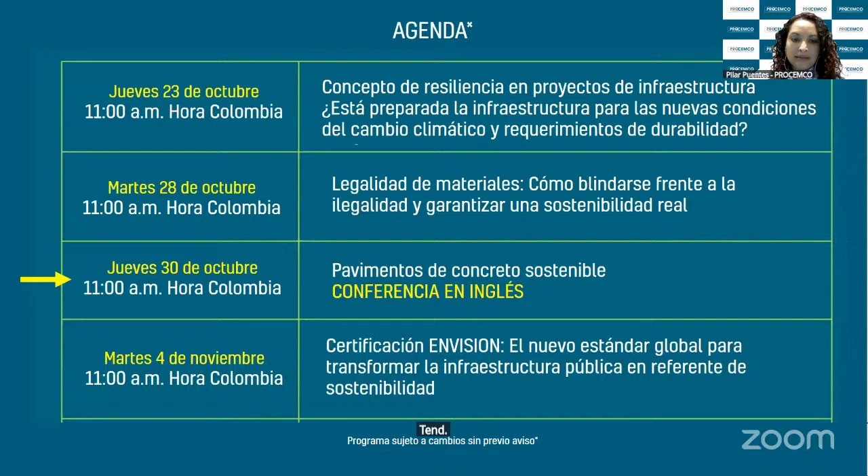Tendremos esta tercera conferencia y para presentarnos este tema nos acompañará Thomas Van Dam desde Michigan, Estados Unidos. Y como les anunciamos, esta conferencia será dictada en inglés, no tendrá traducción simultánea, pero sí subtítulos en tiempo real generados por IA. A continuación voy a presentarles a nuestro conferencista de hoy.

Él es Thomas Van Dam, ingeniero civil con más de 39 años de experiencia en materiales de concreto, en sostenibilidad, resiliencia y evaluación integral. Sus áreas de especialización incluyen durabilidad de pavimentos y losas, investigaciones forenses y la reducción de gases efecto invernadero. Ha dirigido numerosos estudios de diseño, análisis de costo de ciclo de vida y estudios comparativos de concreto con bajas emisiones de carbono, incluyendo maquetas a escala real con más de 100 publicaciones. Ha colaborado en proyectos de investigación exitosos para agencias federales, departamentos de transporte estatales y la industria privada.

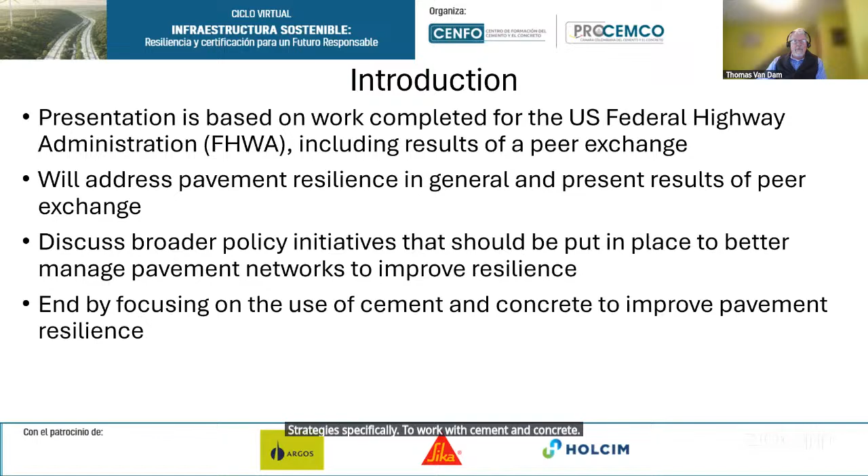Now, there are many resources that you can download. In the United States, we are having, let's just say, a difficult time these days. So some of the publications that we have worked on in the past are no longer directly available. But if you search by title, you will still find them. So they are no longer on the Federal Highways website, but they are still available on the web. So you will get this presentation, so you'll be able to download these resources to help.

I will start by talking about the relationship between sustainability and resilience. Sustainability is there to seek solutions that avoid changes that will impact people and the environment. So when we work on sustainable solutions, we're trying to prevent bad things from happening.

Resilience is related to that, but it's really how do we bring about strategies that will help us endure and survive those impacts. So when an impact such as just happened this week with Hurricane Melissa struck Jamaica, many people think this is related to climate change, the immensity of that storm. What resilience is about is building our infrastructure to resist the damage and then quickly get back and serve people.

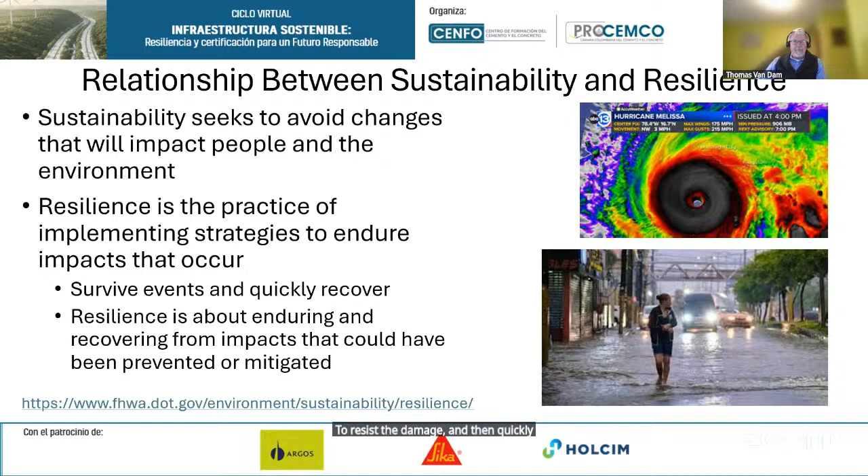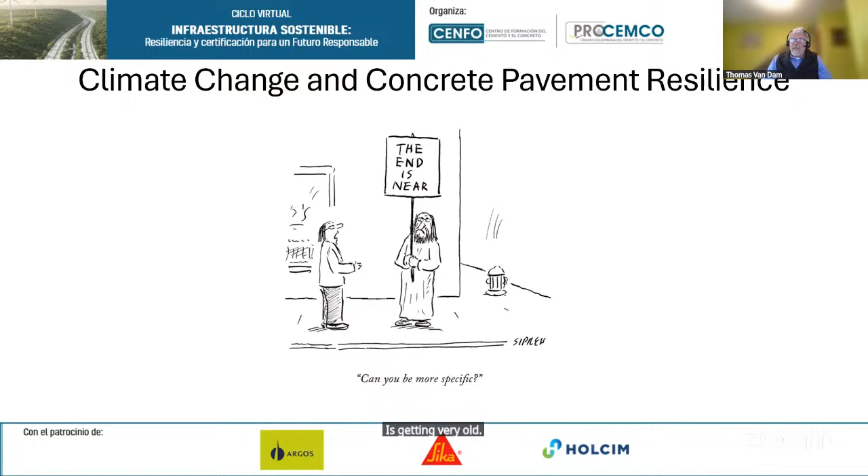Now, this is a hippie holding a sign. This was something common in the United States in the 1960s. And the hippie sign says, 'The end is near,' and you can see this hippie is getting very old. But the individual is asking, can you be more specific? What end is near? So I'm going to talk about climate change and resilience.

Some people do not believe that the climate is changing, but it certainly is. The Arctic is melting, temperatures of the ocean is rising, sea levels are rising. We're seeing flooding events are increasing in both frequency and magnitude, and hurricanes such as we've just seen in Jamaica are becoming much larger and more intense.

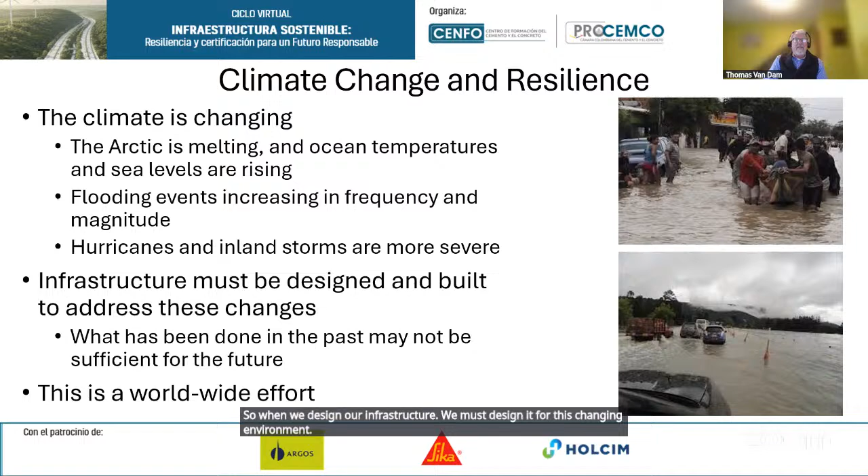So when we design our infrastructure, we must design it for this changing environment. And that is really what resiliency is about. And this is a worldwide effort.

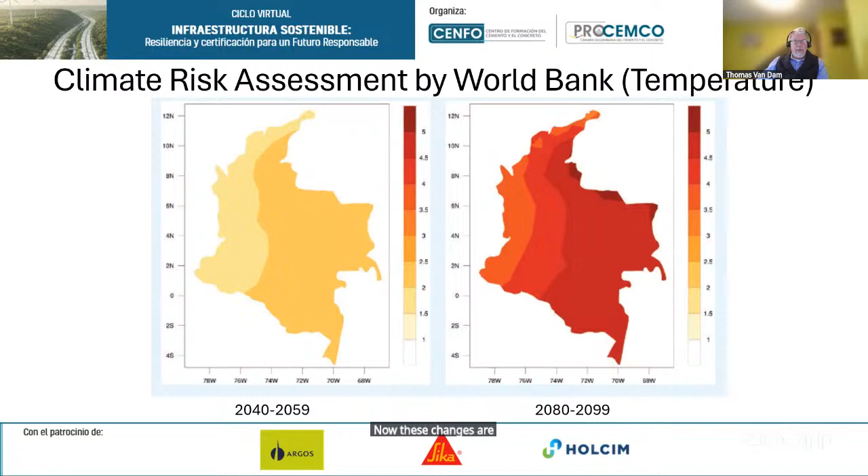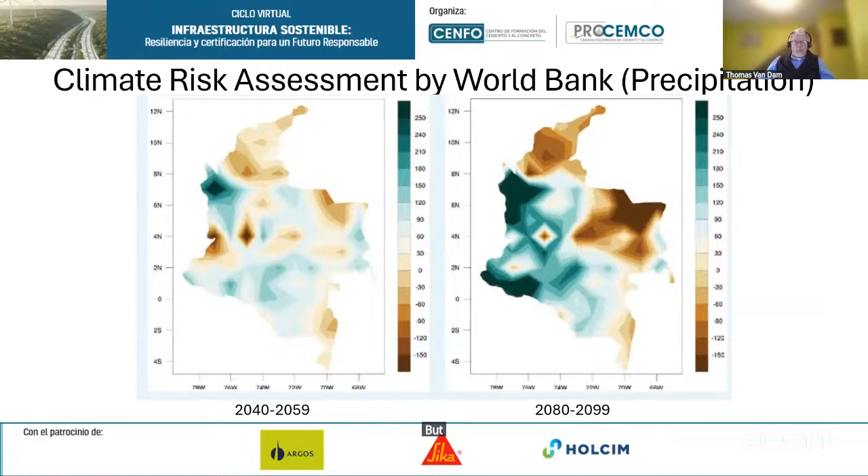Now, these changes are not the same everywhere, but they are overall rising. The changes in precipitation, on the other hand, are variable. You will see some areas are going to get much more rain. Other areas will be getting less rain. So this is something that we will have to adapt to. Many people want to paint a broad picture and think that the trends are the same everywhere, but they are really quite regionalized and something that we're going to have to account for.

So this FHWA peer exchange that we completed a few years ago was really interviewing different DOTs about the impacts of the climate change on pavement. So I will start with the results of that study. The number one issue identified throughout the United States was flooding. So many people think about temperature as being the big change, and that's going to have the biggest impact on, I think, the health of individuals. But from the infrastructure's perspective, it's going to be flooding.

We're going to see increasing coastal flooding due to sea level rise, so that even when it's sunny out, when we have certain tides, roadways will flood that did not flood before. We're going to see coastal flooding when we have big storm events, again, such as we just saw in Jamaica. We're going to see increased flooding of rivers that flow into the sea, because as sea level rises, it kind of dams up those rivers. And we're going to see a lot of riverine flooding. Rivers will flood inland due to high intensity storms that we have not witnessed in the past.

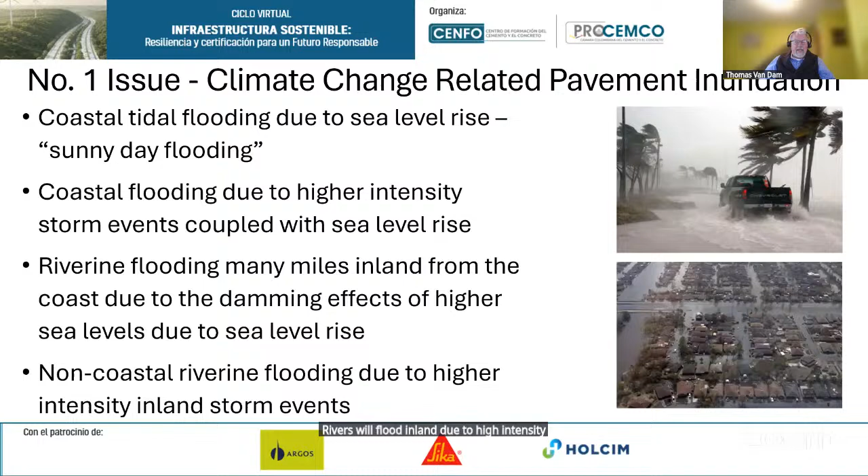Other issues that are related to flooding: there's a lot of uncertainty that now a pavement has flooded, when can we open it back up to traffic? Because we need to get in very quickly to bring in aid and restore service. But when a road is flooded, a lot of damage will occur, and I'll talk about that more so towards the end. So just the fact that the road is getting wet is raising its chance of it being damaged by vehicles.

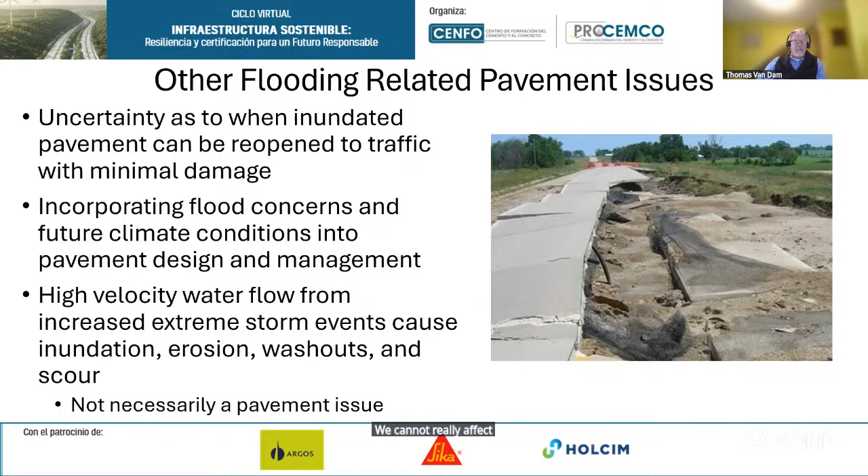Then there's this high velocity water flow. This issue is not one that we can handle with a pavement issue alone, but this is where roadways erode and they wash out. So it's a related issue, but one that as a pavement designer, we cannot really affect. That's really up to drainage and how do we handle that.

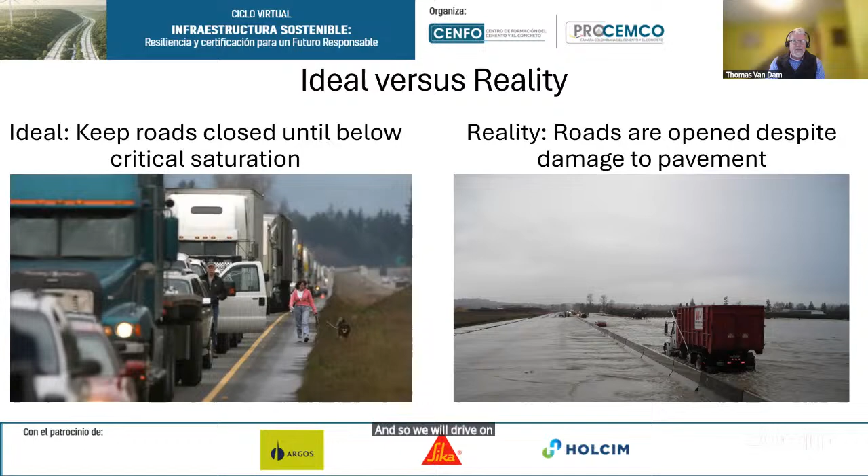In the ideal world, if a pavement floods, we just all wait, we get out of our vehicles, we walk the dog, we have a good time waiting for it to dry. But that's not reality, right? The reality is that we have to use roadways. They're necessary for health, they're necessary for safety, they're necessary for our economic well-being. And so we will drive on these roadways as quickly as we can, sometimes while they are still flooded.

Non-flooding related issues identified by state agency people include temperature as a factor. It will affect some pavement materials more than others. We know the pavement material most affected is asphalt, whereas concrete pavements are relatively unaffected by rising temperatures.

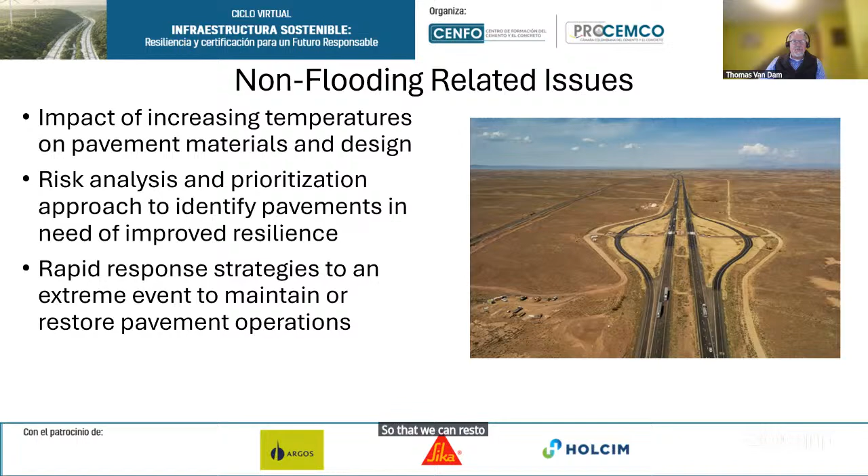We also need to do risk analysis and prioritization to identify the pavements that are going to be most in need of improved resilience. I'll talk more about that later. And then there's this idea of rapid response strategies - how can we know that the pavements are going to be safe to drive on without damage, so that we can restore pavement operations and allow them to be used again to support our society?

When they started looking at techniques specific to dealing with the climate, the first thing everybody focused on was flooding and inundation. That doesn't have to be a flow of a river - it can just be a rising water table.

One of the first things people talked about is, why don't we make the roads higher? We can simply raise the elevation of roadways. But that can have very negative impacts - if we raise a roadway, we're effectively creating a dam, and we may be damming surface water that would normally flow across the pavement, causing more severe flooding. Some agencies in the US have gone to building causeways or very long bridges through areas threatened by continued flooding, but that is very expensive.

Another strategy has been armoring roadways to make them less susceptible to erosion when overtopping occurs. We might not normally put paved shoulders on our roads, or prevent erosion of embankments that don't normally see flooding, and this may become necessary.

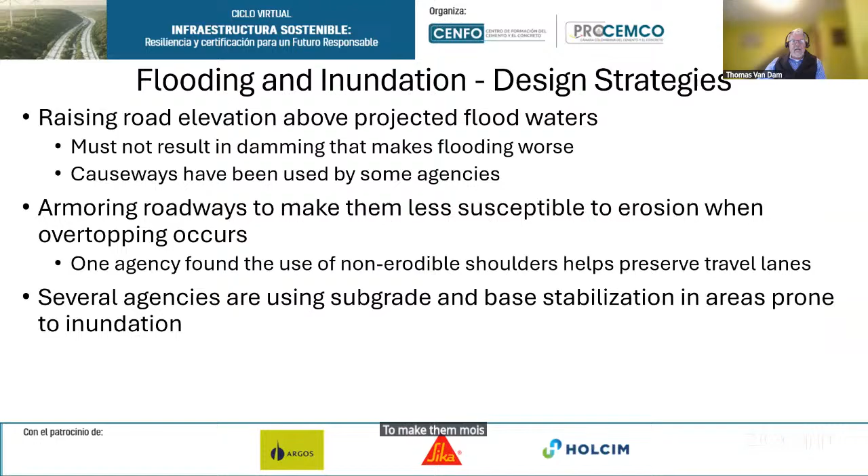Several agencies in the US are now starting to use subgrade and base stabilization. This is where we treat these unbound materials with cement, most often to make them moisture tolerant and keep them from becoming weak when they get flooded.

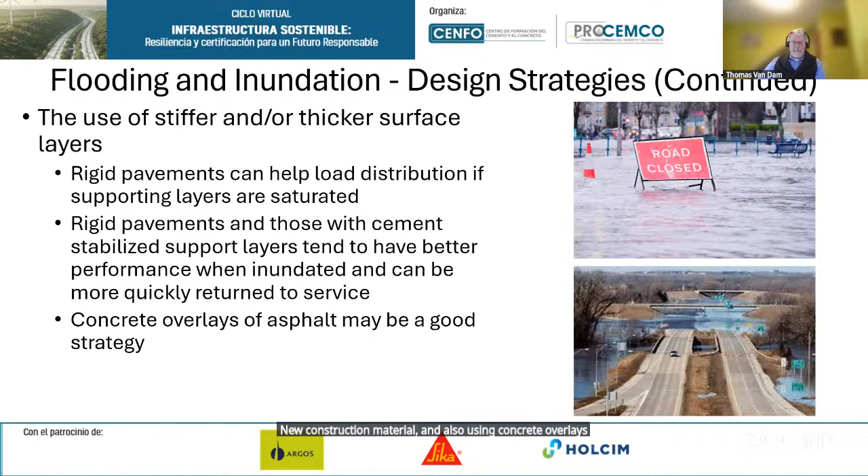One approach most attractive to the concrete industry is using stiffer and/or thicker surfaces. Rigid pavements - another word for concrete pavements - distribute the load much better than asphalt pavements, and therefore are most often more resilient when flooded. This is really the focal point of a lot of the efforts: why concrete can be attractive as a new construction material, and also using concrete overlays over asphalt to make those asphalt roadways more resilient.

Another approach discussed is more robust pavement drainage, to facilitate the rapid removal of moisture from not only the surface, but the subsurface of the pavement. This includes the use of geosynthetic materials and permeable pavement systems.

The final technique looked at is how do we know when it's safe, or can minimize damage to the pavement, before we open it to traffic. Something like a falling weight deflectometer for structural assessment has gained a lot of popularity, where you can test and say yes, we are ready to open. The problem is for many unbound pavement layers that are not drainable, they can take weeks and even months to regain structural capacity.

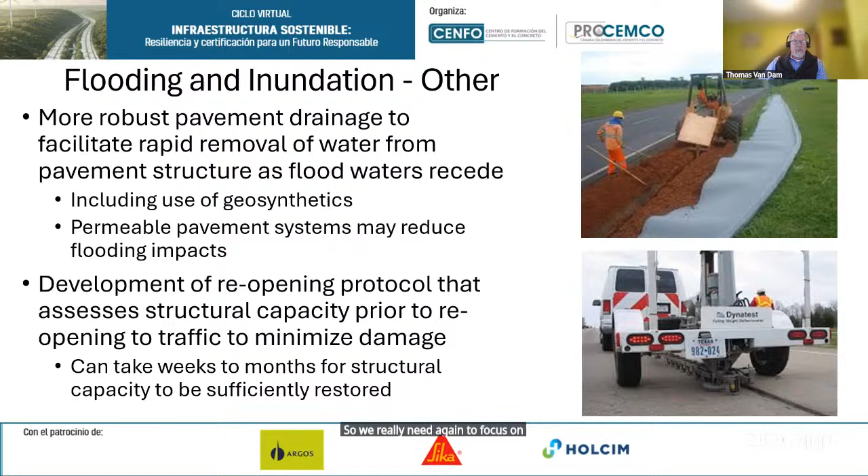So we really need to focus on making these structures more resilient. Now for things to address temperature - basically, concrete pavements are relatively insensitive. I'll talk a bit about risks of concrete pavements coming up, but in general, concrete is a very resilient material.

When building with asphalt, there's a whole lot of things DOTs are looking at. They are polymerizing their binders, building thicker layers, and moving towards what's called balanced mix design. This is a concrete presentation, so I won't spend much time on asphalt, but there are a lot of efforts to try to make asphalt more resilient.

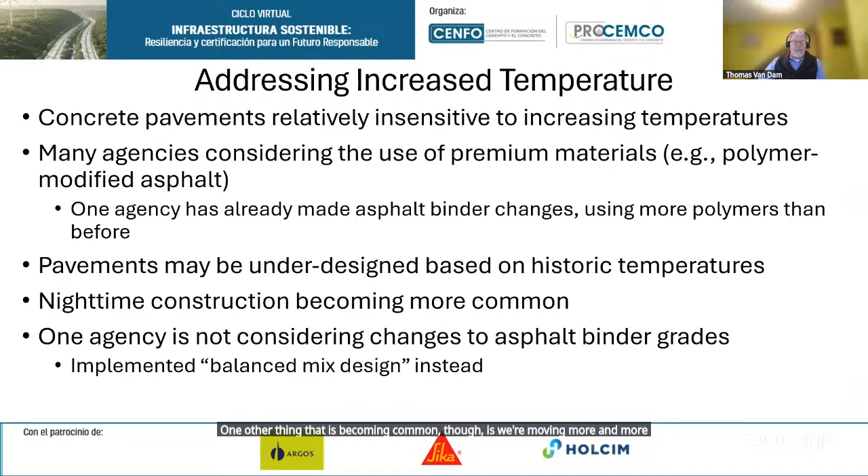One other thing that is becoming common is we're moving more and more of our construction to nighttime to get away from the heat of the day for the sake of the workers.

So when we're addressing design deficiencies, current pavement design methods typically are not accounting for the changing climate. They're not accounting for the level of flooding and inundation that will occur, and to a lesser degree, not accounting for temperature increases. So tools need to be developed to help agencies better design for the coming changes in climate.

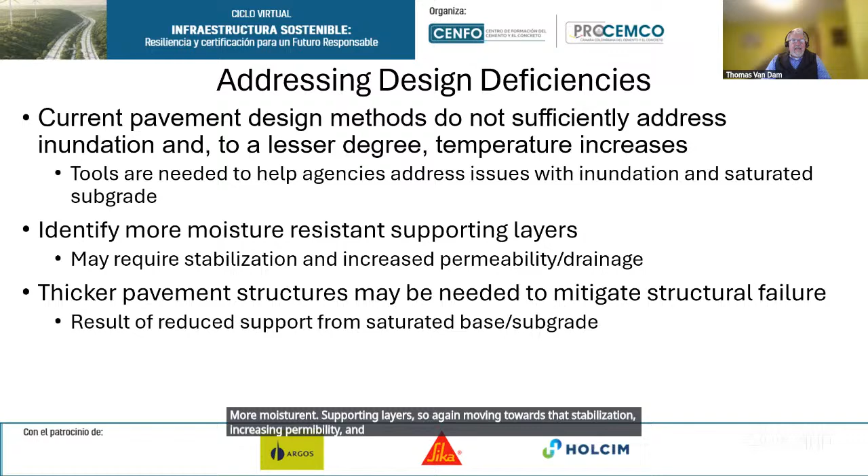This theme keeps coming up again as I go through what the agency people said: we have to identify more moisture resistant supporting layers. So again, moving towards that stabilization, increasing permeability and drainage, and then thicker pavement structures than we have designed in the past.

A really important thing that was pointed out is we have to do a better job of tracking flooding data, and we have to identify how it's affecting our pavements. This is going to create a recalibration of our design models so that we spend the time to understand these impacts and establish and use design, construction, maintenance, and emergency repair protocols for those identified pavements.

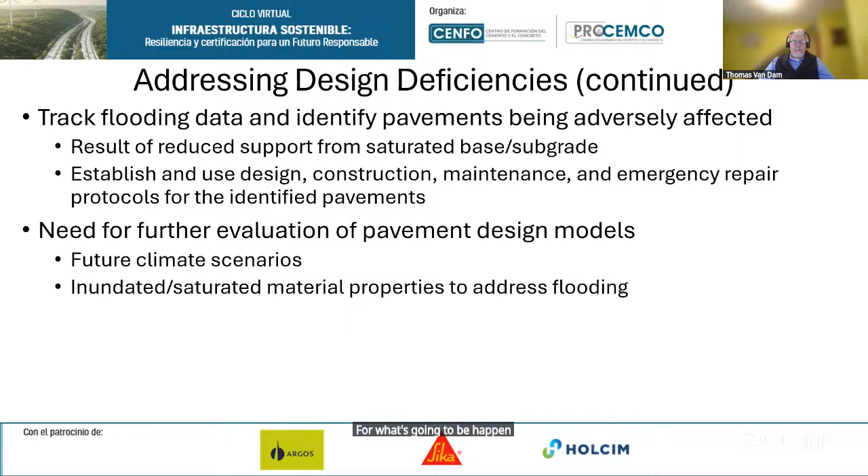There is a need for further evaluation of pavement design models. There's a broad feeling that what we have done in the past is not necessarily going to be adequate for what's going to be happening in the future. So a lot of efforts are going to be expended here.

So the final thing that was brought to the peer exchange groups was how do we approach improving the resiliency of our network? When we look at a network, there are 5 steps that were really looked at.

The first is understand site context and the future climate. The second is evaluate the pavement against future climate scenarios. The third, develop, evaluate, and select adaptation measures. The fourth, review additional considerations. And then the fifth, monitor and revisit or revise as needed. I will go through each of those in a little bit more detail.

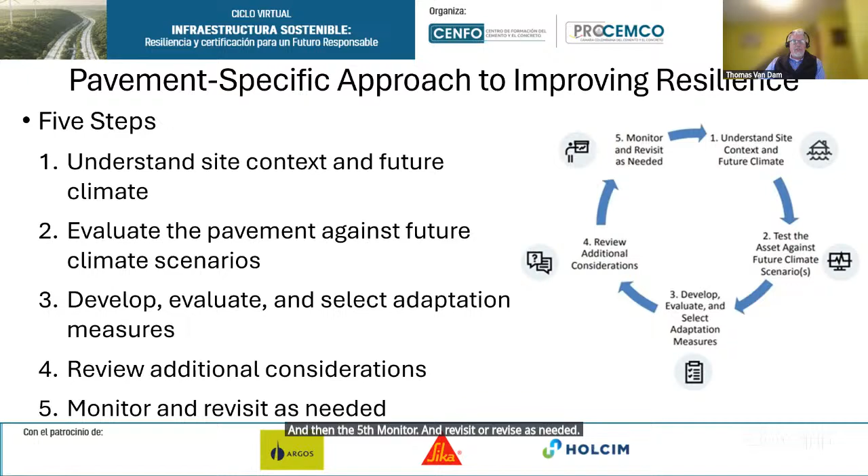So understanding site context and future climate is really, I think, the first key step. It's to look at your pavement network and calculate and determine what are those critical links in your network. Our networks consist of a series of highways to local roads.

It's not just how much traffic it carries, but you have to look at the impact if that link is removed from our network. What is the impact on people? What is the impact on commerce? Can we get food from the markets to the cities? Can people get to hospitals? What is the impact if we lose that link, and how do we adapt? So a very broad analysis of the network to identify the high value links is critical.

Once we identify those links, then we look at our projected future climate and see how they would affect that link. As I mentioned, temperature is not the focus here. It's looking at flooding - really looking at where within our network we expect flooding to occur in the short term and the intermediate term.

So we identify, okay, these are our links, here's where the flooding's occurring. Then we look at the pavement data for those critical links that are going to potentially be at risk. And from that, we determine if they're vulnerable. What type of materials are they built out of? How thick are they? What's their elevation? And then we can really get into that specific climate data, and this key data is often available from universities or from the various environmental agencies that countries have.

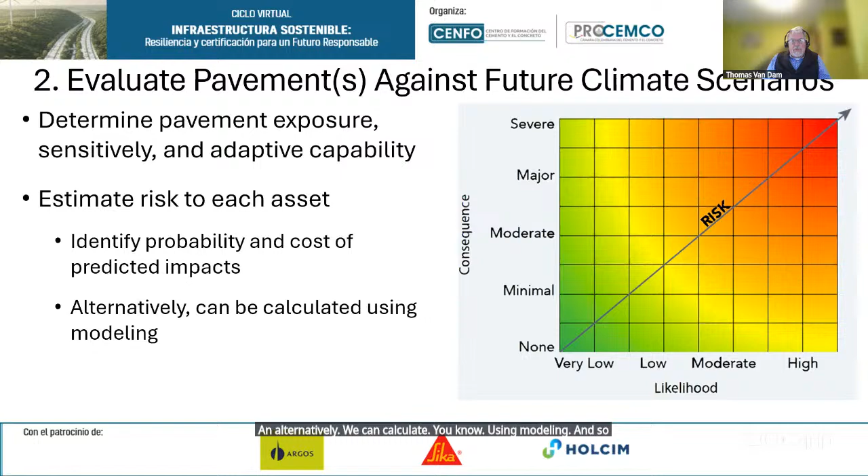You identify probability and cost of predicted impacts, and alternatively we can calculate using modeling. I think this is a very interesting thing to study, and we really need to do more of it. Once we do that, now we have to consider all the possible solutions to address the limitations we've observed. So here we're developing, evaluating, and selecting adaptation measures.

Often agencies have their mix of fixes, which would mean they have a very short list of potential repair strategies for damage that they see. Here's the time to broaden that and look at fixes you maybe did not consider before. It's also important to do studies to look at what has been done by others, what has been found to be effective. We're talking predominantly Colombia and other South American countries here, but you can look at what's been done in North America, Africa, or Asia, that might work.

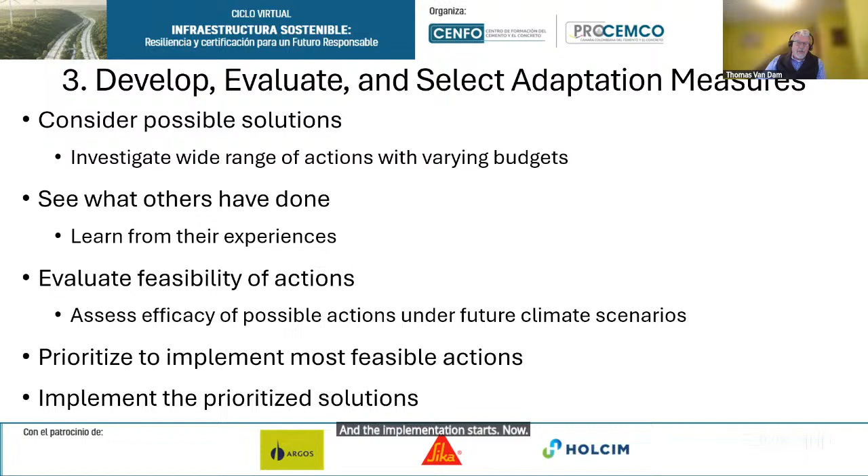Evaluate feasibility of actions. Here we're assessing the efficacy of your possible actions under those future climatic scenarios. You may see that we have a lot of asphalt roads that are not going to do very well if flooded, that have never been flooded or have only seen flooding rarely. What can we do to those that's feasible to make them more resilient? Start really prioritizing to implement those most feasible actions and then implement them. And the implementation starts now, where you bring those solutions into your asset management systems.

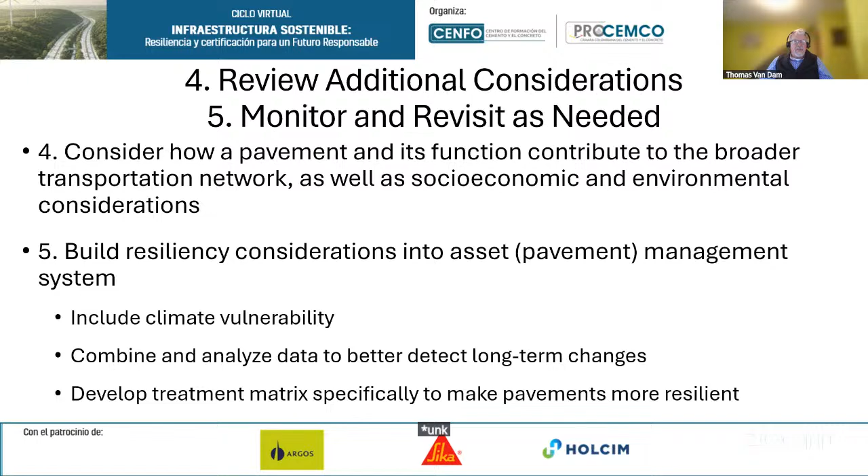Finally, as we start to build these considerations into our asset management systems, we include now climate vulnerability as a factor. We analyze data, we do a better job of detecting long-term changes, and then we develop treatment matrices specifically to make pavements more resilient. Right now, we likely are not doing that. So it may make it so that we have to add additional treatments or rehabilitation strategies for our pavements that we currently don't do.

So specifically, how can we use cement and concrete to improve pavement resilience?

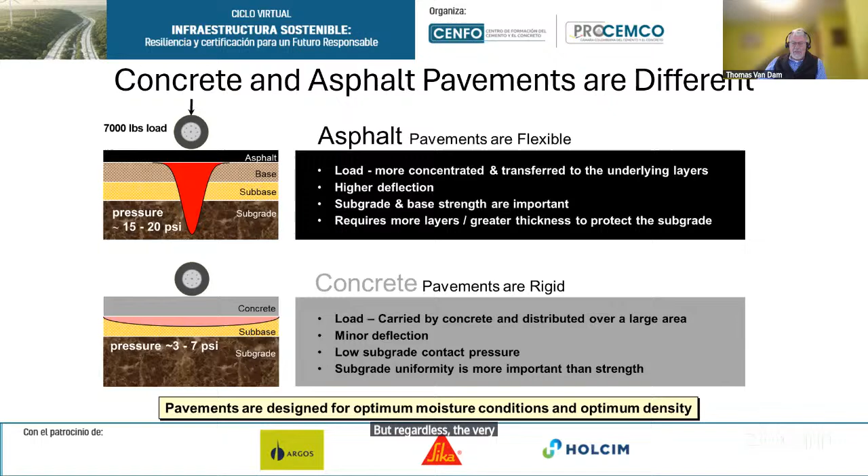One note at the bottom is that pavements are designed really for optimal moisture conditions and density. Our fine-grained soils typically, if they have a lot passing the number 200 sieve—I think that's 0.075 millimeter, please don't quote me on that, my metric is not as good as it should be—but regardless, the very finest particles, if they're in those layers, they just don't drain. So what happens when those layers get flooded is asphalt pavements really have a reduction in their ability to carry load. They will suffer fairly dramatic failure if saturated. The load carrying capacity reduction can even last over a year if there's not good drainage built in, and during those times the pavement is getting accelerated damage.

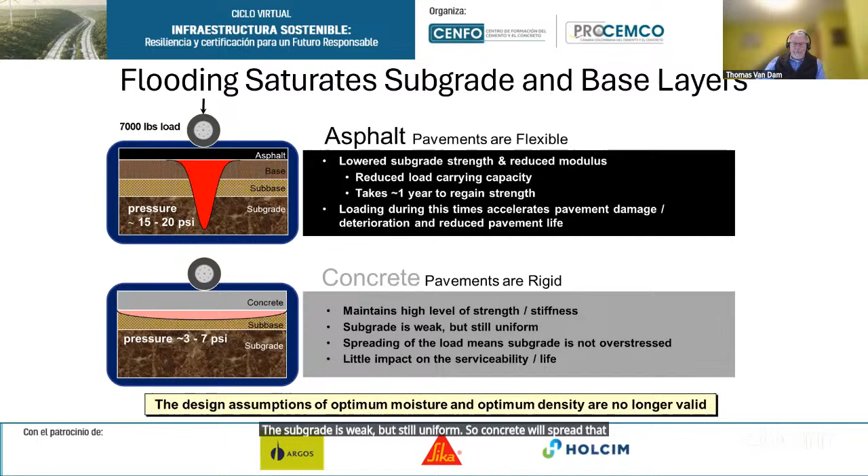Concrete pavements, on the other hand, are able to maintain a very high level of strength and stiffness. The subgrade is weak, but still uniform. So concrete will spread that load out, and even though some damage will occur, it will be to a far lesser degree.

This is an illustration from the state of Florida in the United States. The reference is under sources, and if you download this presentation, it's available to you. What they found in this case is that even over a year, they still lost the structural capacity of that pavement. The flooding event itself may have only lasted a few days, but once that system got saturated, once the groundwater rose up, they could not dry it out. For this particular case, they lost 40 to 60% of their strength, their load carrying capacity, over a period that resulted in really about a 3-year loss of life.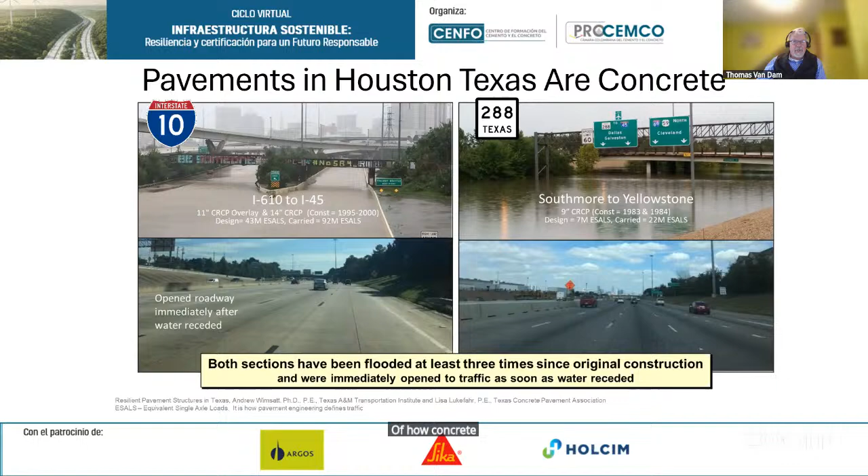Some other opportunities - that is if you build out of concrete new. If you are going to use asphalt though still, there's a tremendous opportunity to use cement for stabilization. In these cases, you can have soils that would be very susceptible to loss in structural capacity if saturated. These can be treated with cement to effectively desensitize those and keep them maintaining their load carrying capacity even if saturated.

Concrete pavements for critical pavement links that are expected to be inundated really should be prioritized and stabilized - not only the subgrade but also the base - and consider that if they're not going to build with concrete.

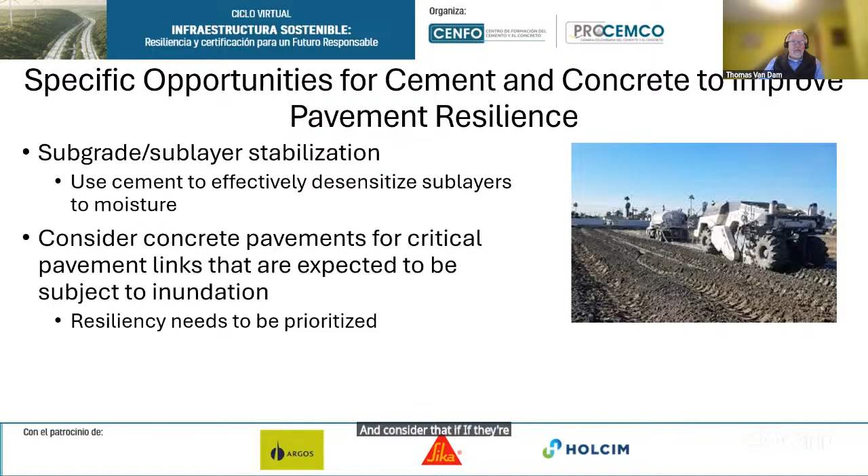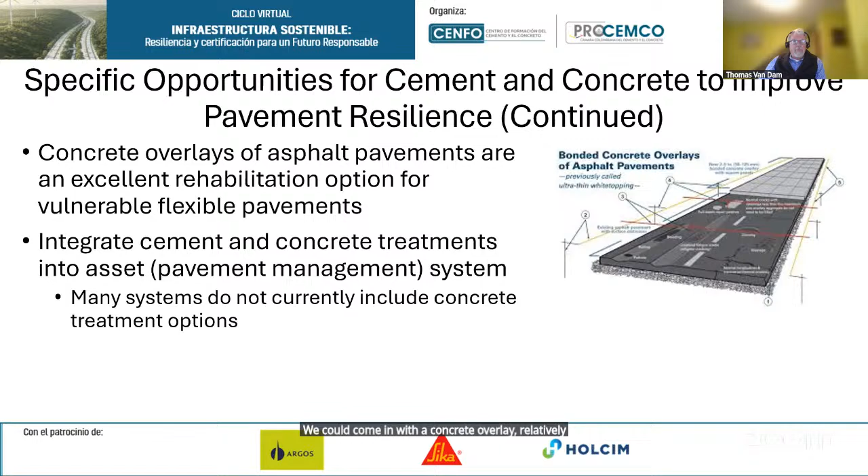The other thing is we have a lot of asphalt pavements out there that we will identify as critical links that will be subjected to flooding. Recognizing that, a great alternative is to overlay them with concrete. These concrete overlays might be 150 millimeters thick, or as thin as 100 millimeters thick, but they've been found to be able to spread the load out. So we could have an asphalt pavement that could be at risk, and we could come in with a concrete overlay, relatively thin, and that will significantly improve the resilience of that pavement.

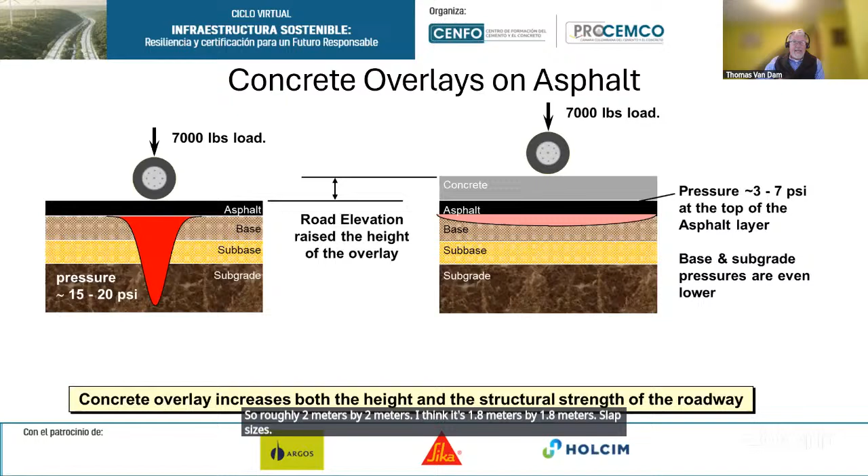It does that, again, by that same load spreading phenomena. So there's no need to reconstruct the road - it's strictly placing concrete on top. Typically, we are placing these now at 150 millimeters thick, and the slabs are 6 foot by 6 foot, so roughly 2 meters by 2 meters - I think it's 1.8 meters by 1.8 meters slab sizes. These have significant ability to improve the load carrying capacity when flooded.

Now, there are concerns also, as we mentioned, with temperature. The big one on asphalt, of course, is that asphalt is a viscoelastic material that is quite sensitive to increasing temperatures. The asphalt binder becomes far less viscous and starts to flow, and this leads to rutting and shoving. If the layers become also flooded, this becomes even worse.

As we mentioned, concrete is relatively insensitive to temperature, but the problem that we have been suffering in the United States is some of our older concrete pavements where we have not maintained the joints, we have not kept the joints cleaned and sealed. When it gets really hot and it's really humid, with a lot of moisture in the air, that concrete will swell to the point that the joints cannot accommodate that movement, and we get a phenomenon called blowups.

These blowups we've been seeing most dramatically in the late spring when there's still a lot of moisture, and all of a sudden we get big temperature spikes that we haven't seen in the past. They can be fairly dramatic. So this really does speak to the need to have good design elements and good maintenance practices on concrete to avoid blowups from occurring.

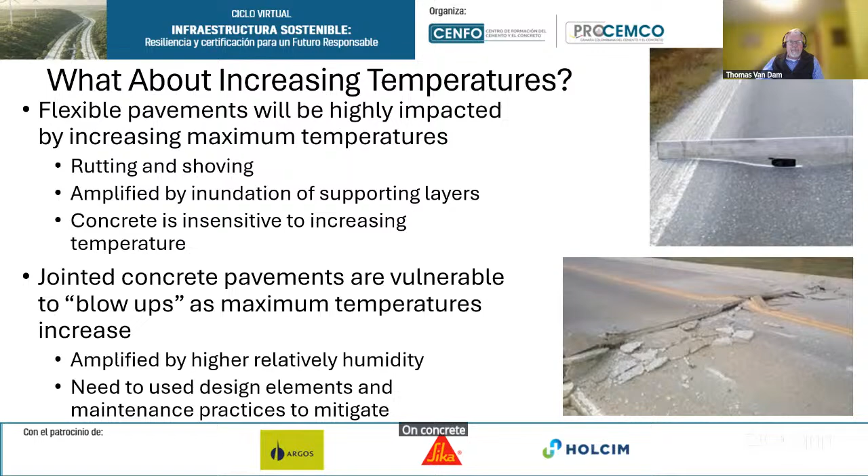So to conclude, the conversation on resilience is driven by climate change. What has happened in the past is not necessarily what's going to happen in the future, and I would even say most certainly will not. So we have to really understand that things are changing. Resilience is the practice of implementing strategies now to endure and rapidly recover from the impacts of this change, to resist changes, and it requires long-term planning and good decision making.

I know that, for Colombia, your government officials are always making good decisions, but we are suffering a little bit here in the United States right now. Hopefully, luckily, a lot of the state agencies are still operating and doing good decision making. And that was a joke, just so you know.

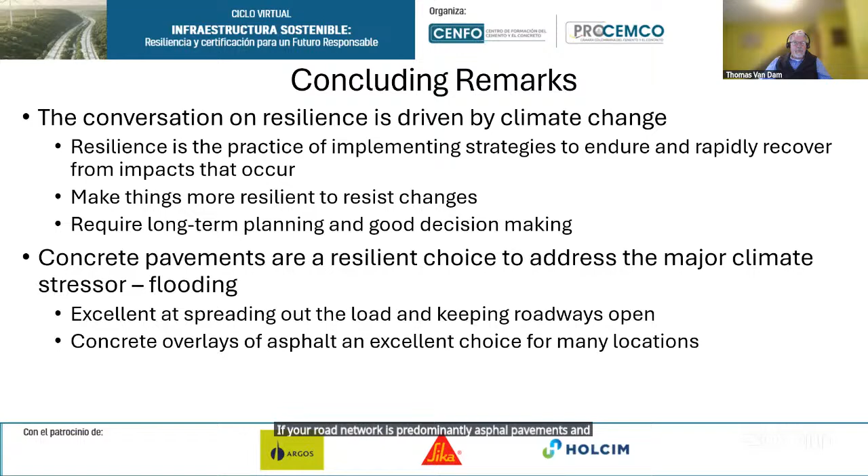Concrete pavements are also a very resilient choice for the reasons I discussed. They're exceptionally good to deal with inundation and flooding because of their load spreading capability, and roadways can be kept open even if flooded. Concrete overlays of asphalt are really an excellent choice if your road network is predominantly asphalt pavements and you need to immediately improve the resilience of some links.

We talked about 5 specific approaches. I think this is a very exciting area because there's a lot of opportunity here to learn and then apply what we have learned, integrate it, monitor it, tweak it, and improve it. Cement and concrete have a very positive role to play in improving pavement resilience.

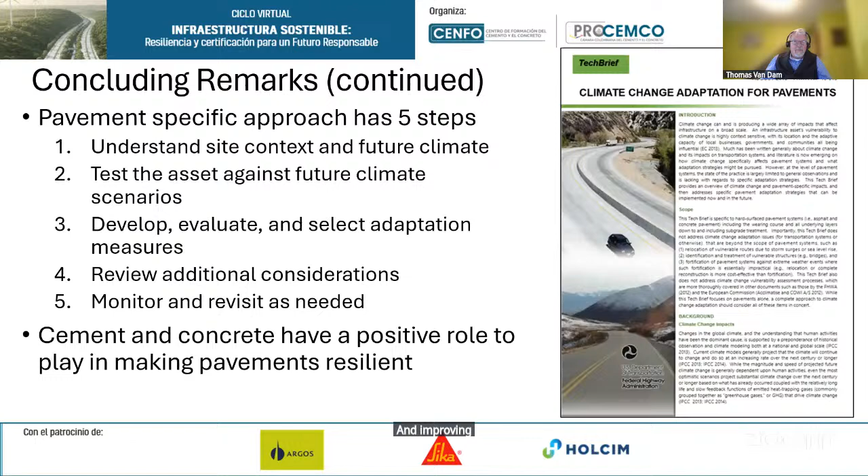In my trips to Colombia, what I always loved was how smart and educated the young people were. I don't know how many young people are on this call, but I do know that the folks I've talked to so far were young people. It's always so exciting to me to see how inquisitive and educated Colombians are. So I think a very bright future awaits you. And with that, I would be ready for questions.